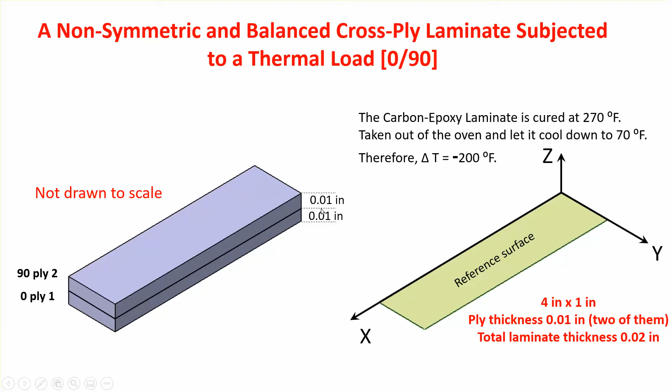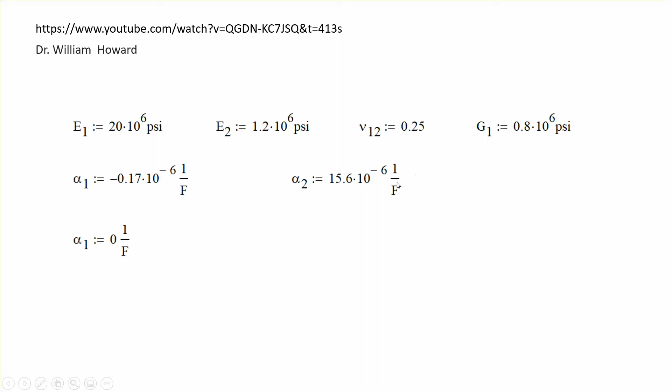Okay, now this problem was done analytically in that site, except that the coefficient of thermal expansion in the fiber direction was taken to be negative. However, CATIA will not take a negative value. Therefore, I'm going to assume, because this is a very small number compared to alpha 2, about 100 times smaller, I'm going to take this thing to be 0.

The other thing that you should realize is that this coefficient in my database is going to be described as per degree Fahrenheit, but I have to convert that to per degree Kelvin because in CATIA, the coefficient of thermal expansion, I could not change the unit of it so that it reads as per degree Fahrenheit. So I have to make this conversion here. So multiply this thing by 9/5, which comes from the formula, conversion from Fahrenheit to Celsius. And this is the value that I'm going to be inputting.

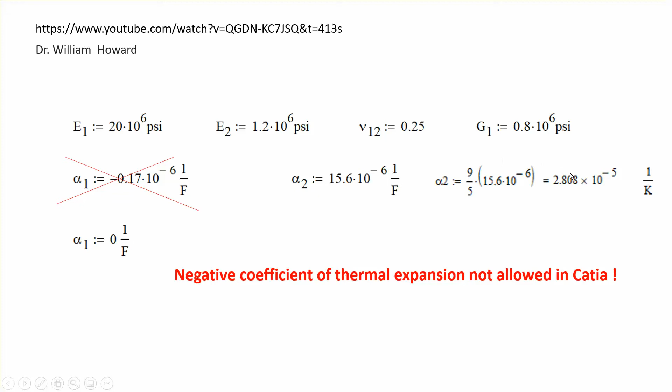The second thing is that this thing is going to move out of plane, basically bends. Okay, and that's why there are curvatures there in that site where the hand calculation is done. Actually, this is a screenshot of that particular calculation, but this number is not correct. I looked at the presenter's Excel spreadsheet. These numbers are not on the spreadsheet. There are 2 other numbers that are there, and they're these numbers. Okay, so this is a mistake.

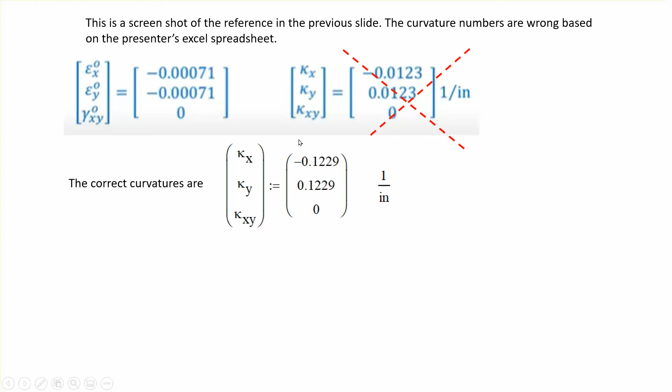We're going to be comparing the curvature with this information, and now also the strains are given. Strains are given in that screenshot of the fellow's work, but these are in-plane strains. In CATIA, at least to the best of my knowledge, and I couldn't find anything contrary to that, the in-plane strains are not provided to you. The curvatures are, but the in-plane strains are not provided to you.

So in order to compare this guy's work with what CATIA does, I have to calculate the strains based on the in-plane strains, which are here, and that's the classical lamination theory formula for each ply. For one of the plies, the mid plane of the top ply, for example, is at half of the thickness of the ply, 0.005. Remember, the thickness of the ply is 0.01.

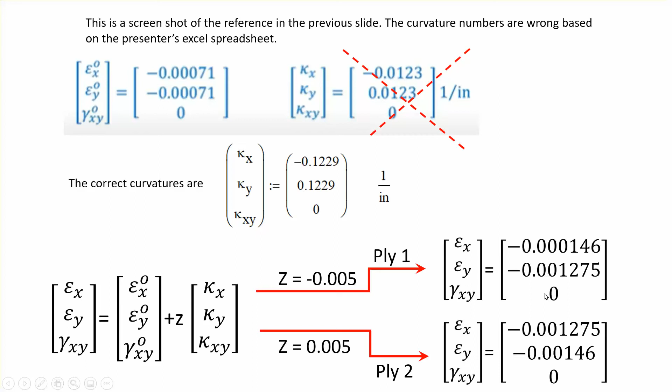Okay, half of it is this, and you plug in your Z here, you plug in these numbers, and these are the strains at the top lamina, and then when you put a plus 0.005, it's going to give you the strains in the bottom lamina. So these I can get out of CATIA, but not directly that fellow. And we're going to see how well it compares with the results there.

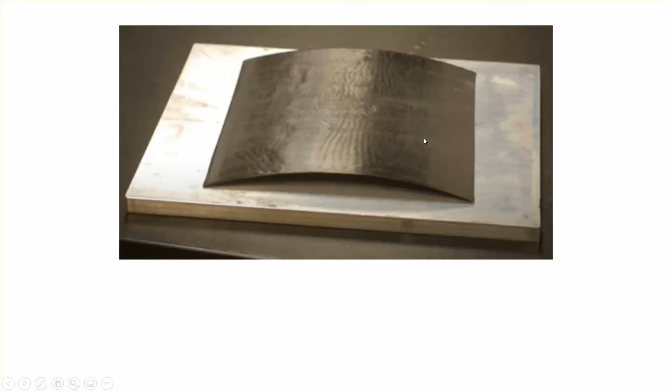Now, the bottom line is that if you take the ply out of the oven and you let it sit there, cool down, it's going to bend. This used to be a flat composite strip, but it's going to bend.

Now, these are going to be done in 2018, and in the previous video segment, I mentioned that if you're doing this thing with earlier versions, be careful because there's quite a few bugs in different places, particularly with the plotting of the stress components. And so I'm pretty sure that these are corrected in version 2018. There may be other bugs, but definitely not plotting stresses. So although it runs and you get the same deflection and the von Mises stress, you've got to be careful about the specific components of the stress.

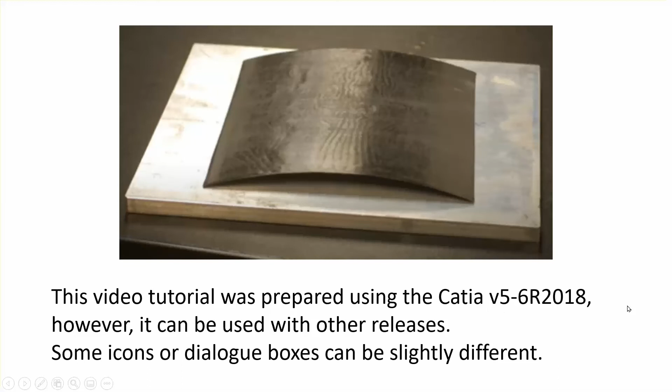Okay. All right. So let me move this thing down. Keep it handy. First thing I want to do is create my material database. So it's going to be Start, Infrastructure, and Material. I've done this many times throughout the last 14 or 15 videos that I've provided. Let me give the name of it, my second video thermal composite. The thickness is 0.01 inch. And this is going to be unidirectional.

Okay, and apply. As for material, click on the analysis, select 2D orthotropic, and for longitudinal, it's 20 million, 20e6. For transverse modulus, 1.2e6. Poisson ratio, 0.25. Shear modulus in the XY plane, 800,000. And in the other two planes, 400,000.

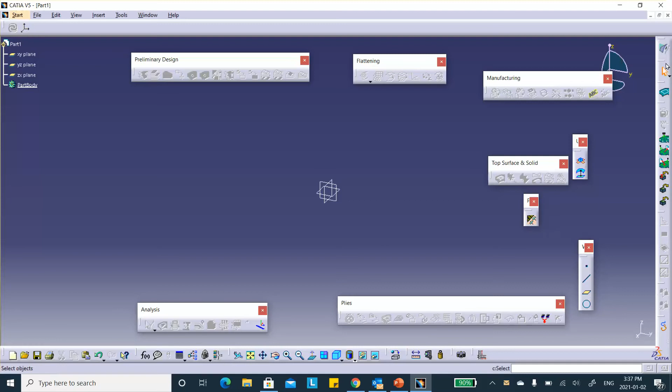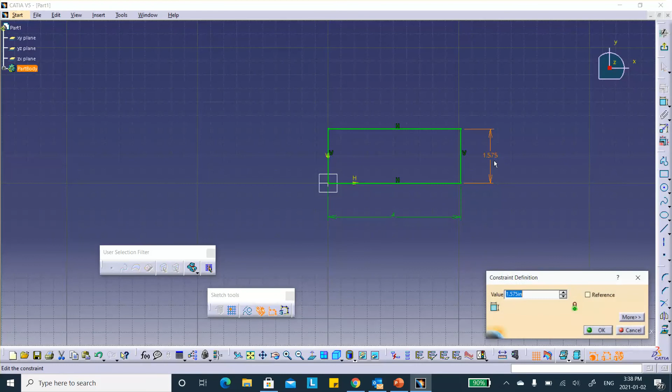Okay, so under Generative Shape Design, on the horizontal plane, I will sketch a strip which is 4 inch by 1 inch. Exit, fill, join it. That's my favorite thing to do.

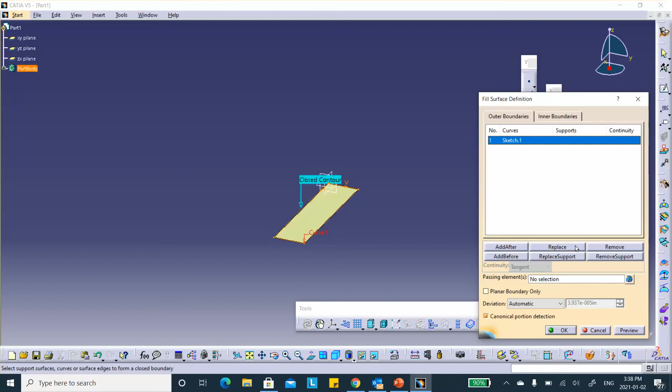Double click on it. Oops, cancel. Did I join this? Let me see for a second. What did I join? I wanted to join not the sketch, the surface. So let me replace this. For join, I want to select that surface fill. Maybe I cancel this. How about delete? Okay, do it again. Join, fill. Okay, double click, flip the arrow.

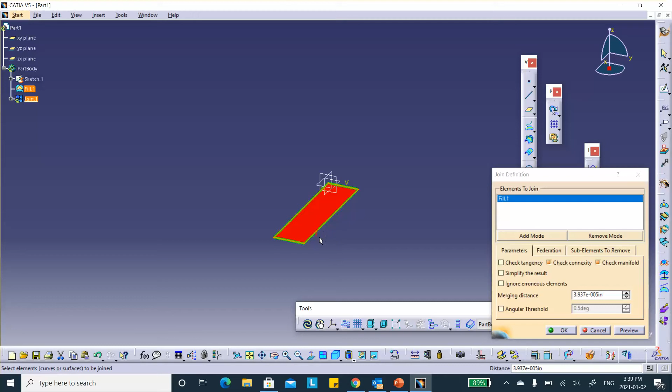Flipping the arrow means that the shell elements that are going to be created on the surface, their normal is going to be opposite to this red one that I just flipped. This is not an absolutely necessary step, but I like to do that for good reasons.

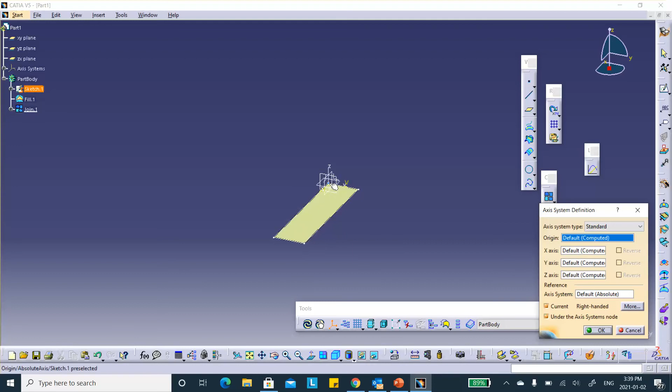Okay, so now we're going to create a coordinate system that will be used as a rosette, so axis system. Default is placing it at the global origin 0, 0, 0, but I want to move this thing a little bit to the left so that I can see it better. So I'm going to create a point and move this to the position -2 for Y.

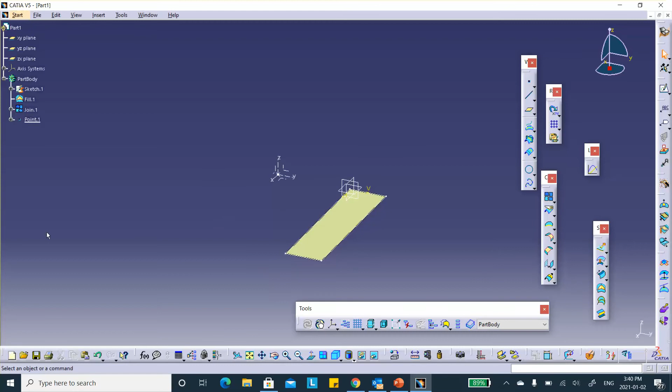And I'm going to uncheck the current so that from now on, this is not going to be used as the coordinate system. Just the global one will be used. All right, save everything. So File, Save Management. This is my part, save as. It's going to go into that folder that I created. Remember, this thing, material database is here too. Say OK. We are done as far as the geometry creation is.

So we're going to go to composite design, parameters. See that? Composite parameters. Add a material. I go to that folder that I created my material. It was called my second thermal video, and it was this thing. And there is only this material in it. Remember, this is the one that I changed. I named it my second thermal video, whatever. The thickness I changed to 0.05.

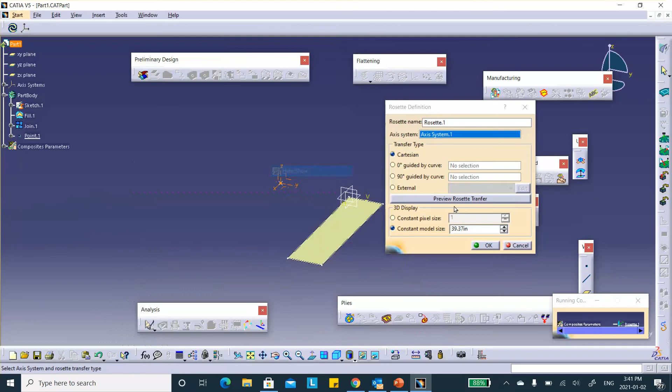Now, as far as direction goes, all we need is direction 0 and 90. These are default values, so I don't have to add anything. So rosette, you add a rosette, and you select the thing that you created right there. Let me hide this thing, and we say OK, and we're good. Okay, so now we're going to create our plies. So this is just 2 plies, very easy. We can do that manually.

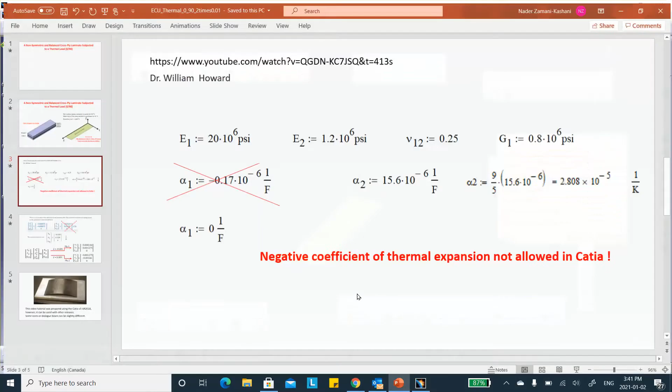So I'm going to create my ply group right there. See that? Ply group. The surface is the one that I joined. The draping direction, I flip it up. So what that means is that the first ply that I'm going to create in this drawing was 0. Then the second one, which is 90 degrees, is going to be on top of that in this direction. That's really what it means, okay? And lock the plies draping direction. Okay, very good. So let's start with the first one.

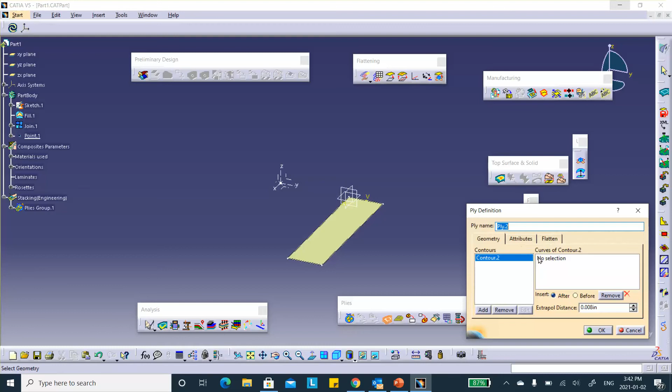And the first one, this is going to be ply right there. It says, where is the group that you want to add it to? Well, I want to add it to this. And the contour of it is going to be that sketch. See that? And then the attribute is going to be 0. The bottom one is 0, so that's good. Say OK. For the second one, you click on the ply again, select the group. For the contour, we select the sketch, and for the attribute, we select 90 degrees. Material is already set because I set it on the Ply Group. Okay. All right, that's good.

So here are the two plies that I created, ply 1 and ply 2. You can always look at these by the ply exploder. Apply. The gray one is the default color for 0 degrees, and the blue one is the default color for 90 degrees. So this is good. Did it the right way. And we're going to save it.

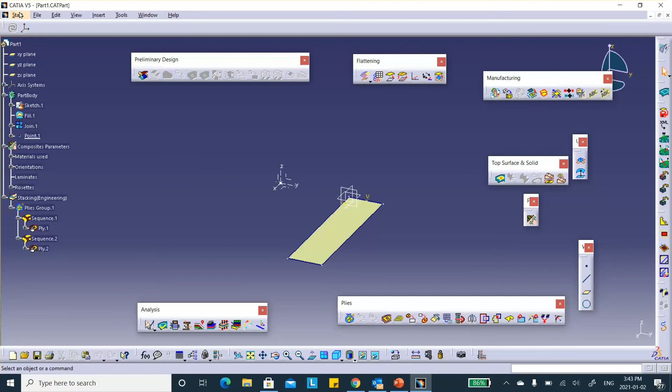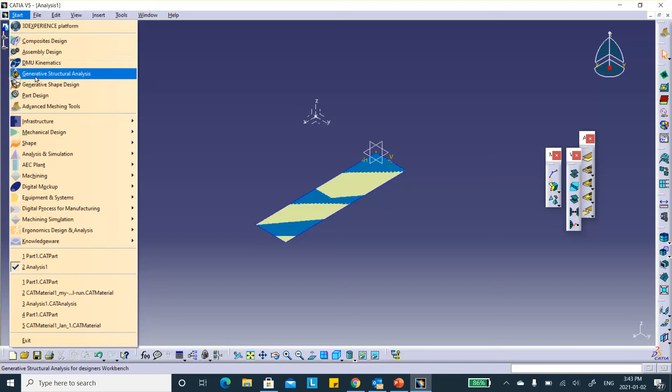All right. So now we're going to go to the advanced meshing tools. And you're going to mesh it with the surface mesher. We're going to mesh this. And this is going to be 0.125. And mesh it. Zap it. And you're done. Exit. Let's go to the Generative Structural Analysis. Why don't we look at our mesh? Right there. Change the rendering. There we are. Looks good. So deactivate this mesh. Okay, so that takes care of this, and then we are pretty much done here.

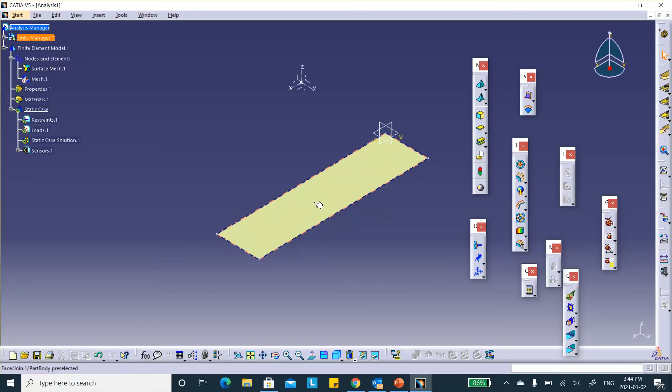So first thing that we need to do is to specify the reference temperature. Well, first we specify the temperature of this composite, and you select that. Of course, I set 70 degrees. The reason it's set 70 degrees already is because when I did the other video segment, it was 70, so it remembers these things.

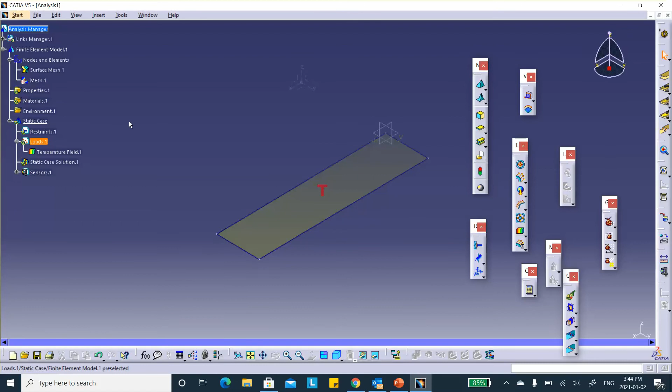Okay, now as soon as I specify the load, the temperature, the thermal load, it automatically adds a line here which says environment. This is where you set your reference temperature. My reference temperature in this problem is 270 degrees. I'm assuming that at 270 degrees it was sitting in the oven and basically there was no stress in it. Okay, so that is the reference. When I take it out of the oven, it's cooled down and it shrinks, and there are going to be thermal stresses in it.

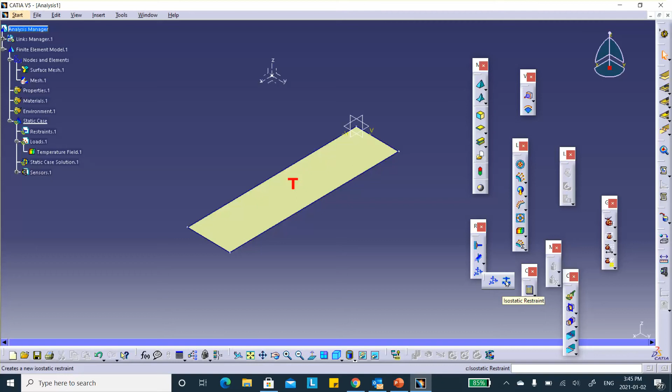Now, if I run this right now, I will have a problem because there's no restraint on this structure. I can apply the good old 1, 2, 3 rule just like I did in the other problems, but I can also do that automatically by placing an anchor on it, and all that means is isostatic restraint on this object that's free to move as a rigid body. What that does is automatically place the 1, 2, 3 rule on some nodes that it takes. In the majority of cases it works, but you've got to be careful and make sure that what you have done makes sense.

I didn't have to choose anything. Basically, as soon as I say isostatic restraint, it takes my part and applies the 1, 2, 3 rule to it. Now, if you want to see what it has done, it's not hard. On the restraint, you put the cursor here, or you put the cursor there. I guess you have to run it first. Let's do a quick run here without numbers. I don't want to run the numbers, so just run it for the mesh.

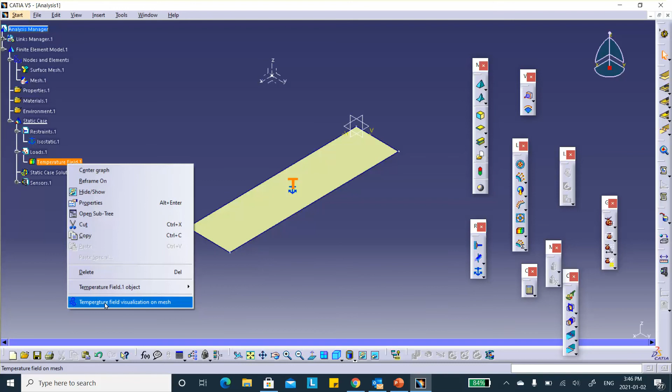When you do that, you can put the cursor over here and say temperature field visualization on the mesh, or I can put the cursor on the isostatic, right click, restraint visualization on the mesh. Now, let me change the rendering here to wireframe, and you can see what happened. It automatically picked 3 nodes, one of them fixed in one direction, the other one in 2 directions, and there's one at the other end, right there, 3 directions. So instead of me doing the 1, 2, 3, it'll automatically do it.

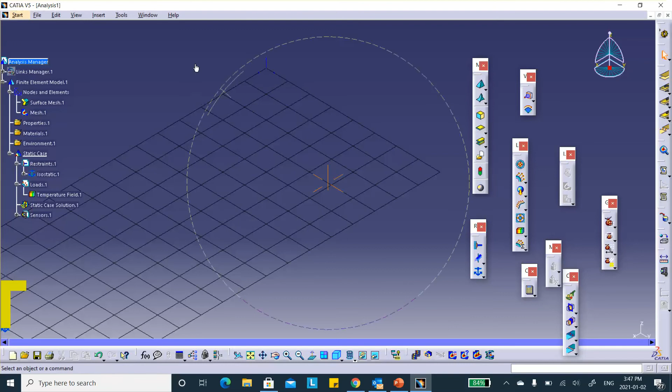And as I said, in the majority of cases it works fine, but I do suggest that you look at some of the earlier videos in the FEA portion of the channel to see some anomalies and things you have to worry about. Anyway, this is fine. Let me change the rendering back to Edge. Okay, good. I'm pretty sure everything is done. Oh, material composite. We didn't import the material. So let me actually deactivate this.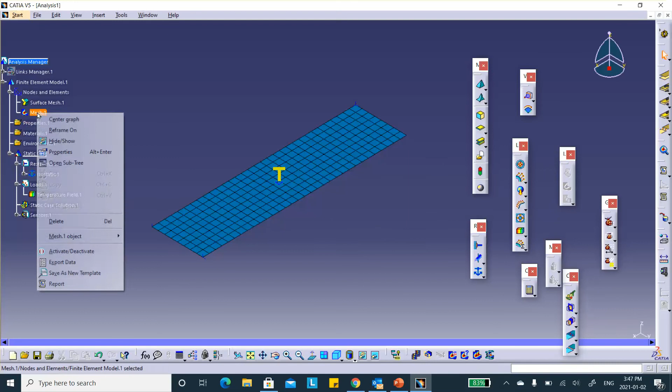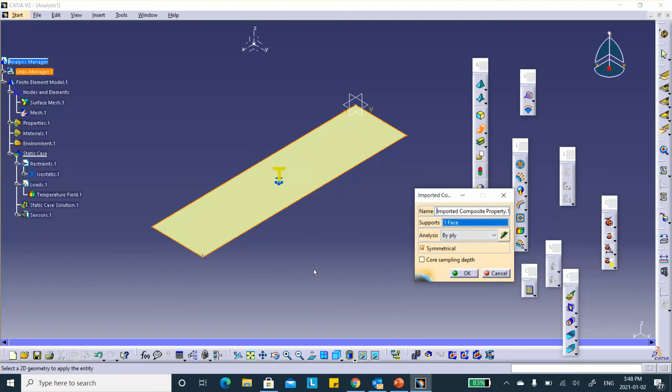As a matter of fact, let me try to run it and show you that you get an error message. If you run it now, you will get an error message. It says you didn't give me the 2D properties. Because this is a composite, 2D property by itself is not going to work. You're going to have to use the imported composite property, and it asks where is the support? The support is that plate, and we're going to do it by the ply. We don't have any zones here, so we're going to click on the ply and select the ply group from the tree.

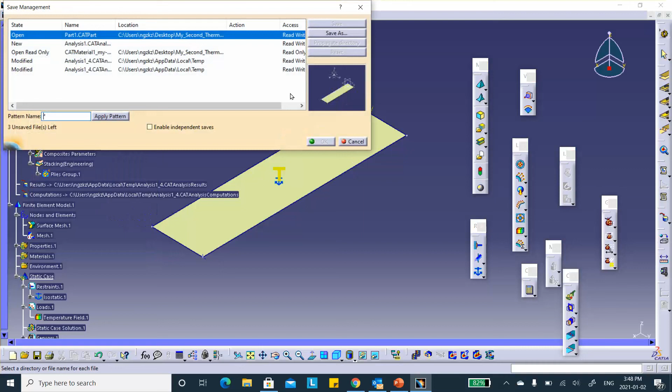Remember, you don't have to select the plies one by one. If you take a ply group, it takes all of those plies, two of them actually. Now, this symmetry means that the 0 and 90-degree plies are going to be placed symmetrically with respect to this plane. So 0 degrees below it, 90 degrees above it, and the thickness is 0.01 for each one of them. Before we run, let's save: file, save management, analysis, save as, in the folder I'm using for storing my results, and always pray, run it.

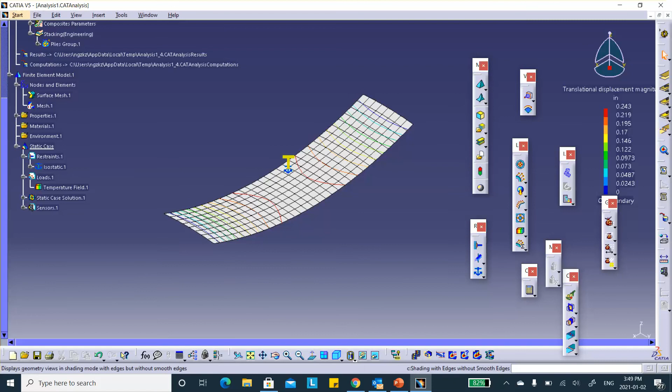Okay, it ran without any messages. This is good. The first thing we want to do is look at the displacement field. If you click on the displacement field here, right there, it looks like so. Now, let's first change the rendering: double click on the visualization average ISO, and change the shading to material shading. So it looks like that. As I expected, it will buckle. Well, I shouldn't really say buckle, it will bend.

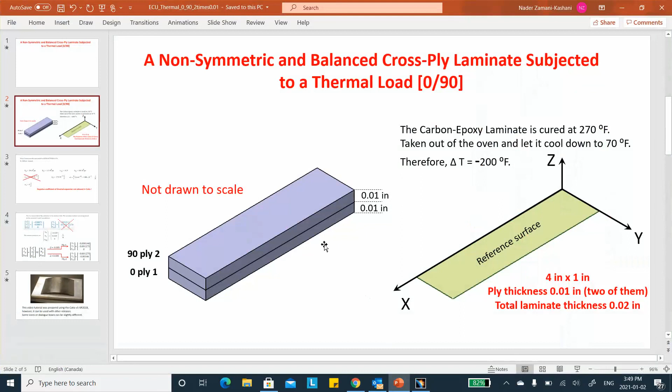Now, we want to compare our results with this. So I want to plot the contour of the in-plane, or the curvature of that initial plane.

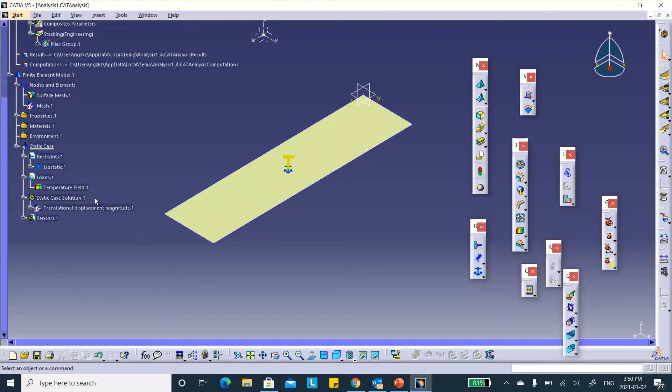So let's deactivate this, deactivate that. Okay, so we put the cursor on static case solution right there where all the plots are stored. Right click, generate image, curvature, right there. Now what this thing is, all numbers, all the curvature values are written in here.

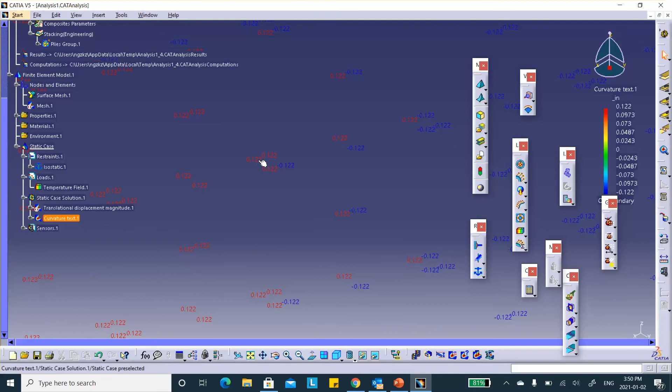Okay, now if you don't like the fact that it looks like this, just look at these. Some of these are 0.122, the other ones are negative 0.122. Okay, and you can see that these are in agreement with the curvatures, because this is gonna bend in both directions. There's gonna be a kx, there's gonna be a ky, but of course there's no twisting. Okay, so it matches these numbers. But what I'm gonna do is to see them better, I'm going to deactivate this.

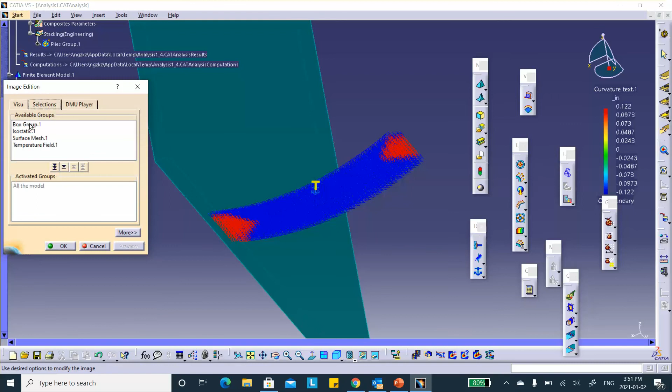My usual thing, create a group. Is that a group, a box group? This box group looks good from previous runs, so we say fine. And we're gonna say show me the curvature, but only show me the stuff in the box group. And hide the box. Okay. So if you look closer, it only shows you the stuff in

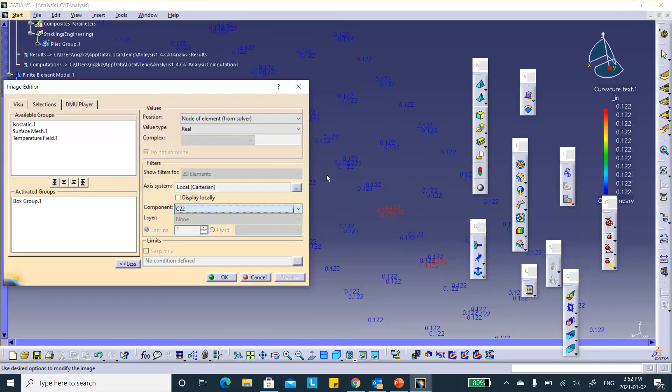in that box. So if you double click on the curvature text, and notice that we are plotting, this is kx, ky is going to be plus. Okay, k1 is going to be minus 0.122, k2 is going to be plus 0.122. Okay, now of course your c12 is going to be all zeros. You can see that these are almost zero, 10 to the minus 8 or something like that. Okay, so let me deactivate this now.

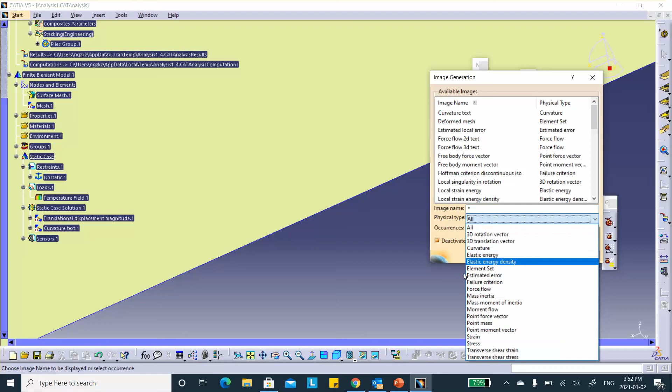Okay, now we put the curvature again. We put the cursor on the static case solution. Right click, another generate image, and this time we're going to do strains. So let me filter this thing according to the strains, strain components right there, nodal values. Say okay. Okay, so let's just look at the stuff in the box. So double click, just select the box. Okay, and incidentally, let me see it in the undeformed shape.

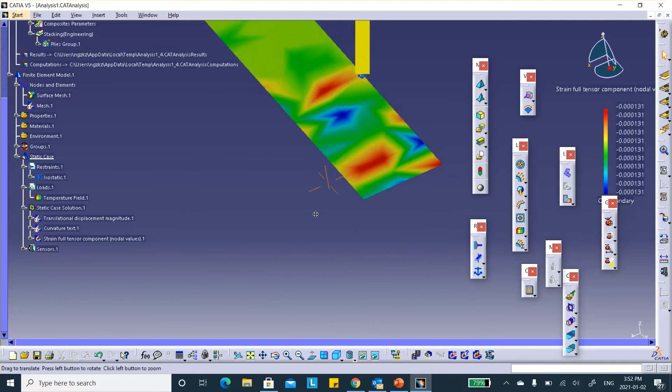So here's what happened. Which ply is this? Now, let me double click on this and use ply number one. Ply number one is the one at the bottom, and it's saying 0.00013. Okay, so let's check this, which is this one. Okay, it's there. It's in that range. These are the negative ones, yeah. And if you go to ply 2, it's going to be 0.0013, two zeros and 13. So it's in line with this stuff. Yes, there are some differences. I realize that, but there we are.

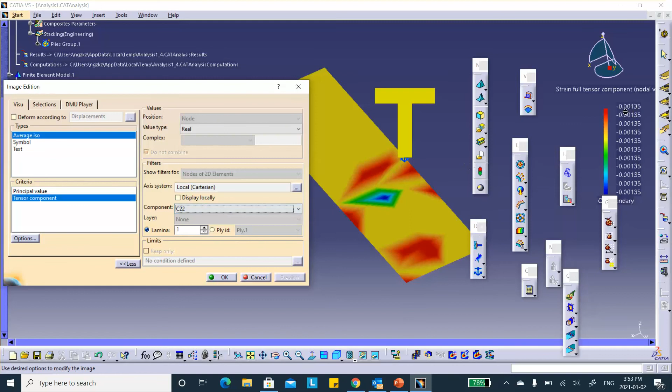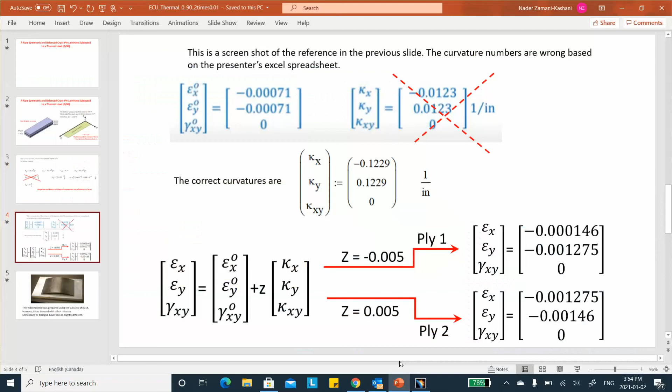Okay. Now, if you go to ply 2, these are both going to be flipped. Sorry, that's not what I meant. Just a second. See ply 1, C22, yeah, 0.00135, two zeros, 135. If you go to ply 2, notice that in ply 2 these things are flipped. Two zeros and a 1, two zeros and a 1. And if you look at C22, three zeros and a 1, which is in agreement with what I've got here. Okay, so what else do we have?

Already talked about the fact that this is going to bend because of the thermal stress and because it's not balanced. No, it's not symmetric. That's what I meant. Okay, and if you run it in other versions of CATIA, be careful about looking at the components of strain or stress because there are some bugs as far as calculation and display. When I say bugs, you get the same displacement, deflection, the same von Mises stress in different layers, but when you look at components of different things, there have been changes. In this version, most of the stuff is corrected.

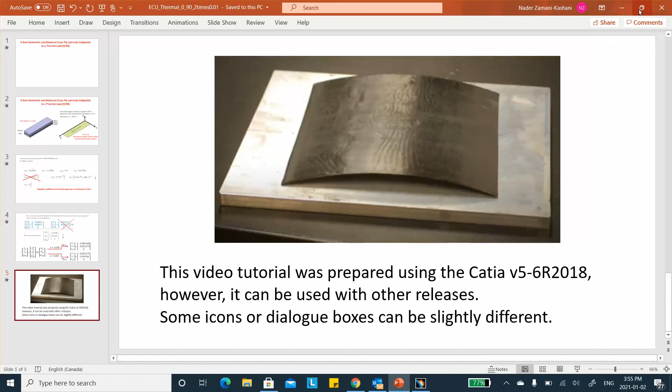Okay. That's pretty much it. And don't let these colors scare you because look, this is all numerical round off. These are all the same numbers.

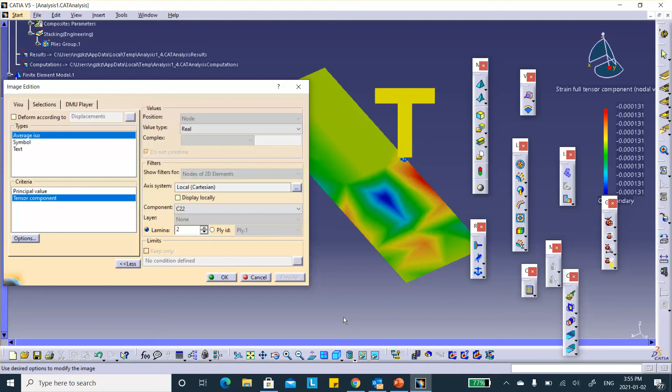All right, folks, good luck. The next one that I'm going to do is going to be a combination of a thermal load. Take it out of the oven, let it sit there. Residual stresses are going to build up, and then you apply a load to it, and you're going to see different things in your model. Okay.